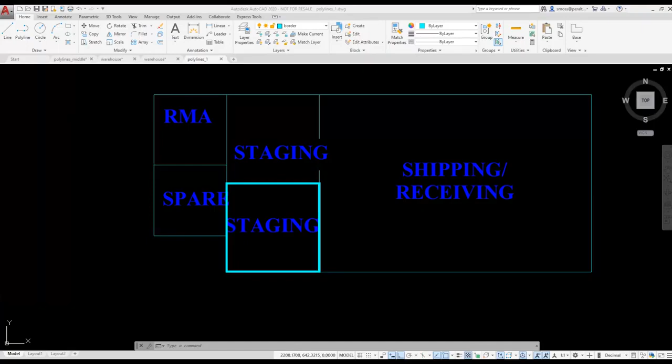The first thing I notice is that the text I have here is too big for the spaces. I want to select it and change the text size. A fast and easy way to do that is to use the Select Similar command.

I select one of the text elements, right-click, and choose Select Similar. All of the text is now selected. I right-click and choose Properties.

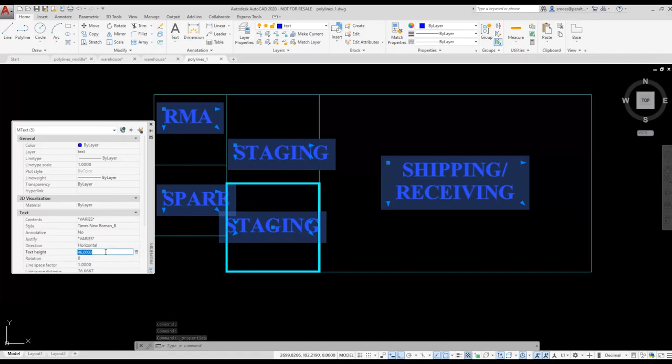I want to change the text height. Right now the text height is at 48. I'm going to change it to 30 and press Enter. Notice that all the text immediately changes. I was able to select all the text elements very quickly and adjust the size using Select Similar and Properties.

Next, I want to center the text in each space using the geometric center for each space. I verify that the geometric center snap is enabled on my object snaps on the status bar.

I right-click on a text element and choose Properties. I'm checking to see the justification setting for the selected text. It's justified as top left. I changed the text justification to middle center.

I should be able to use the grip in the middle of the text to position the text inside the space and use the geometric center to locate it. It doesn't work. I press Escape to release my selection. I need to figure out why it doesn't work.

The reason it doesn't work is the space isn't defined using polylines. They're individual lines. AutoCAD displays the element information when I hover over the elements. I have one existing polyline in this drawing right now, and that is for the lower staging area.

In order for me to center the text properly, I need to set up each of these spaces as a polyline. I'm going to change my layer to border to make it easy for you to see what I'm doing.

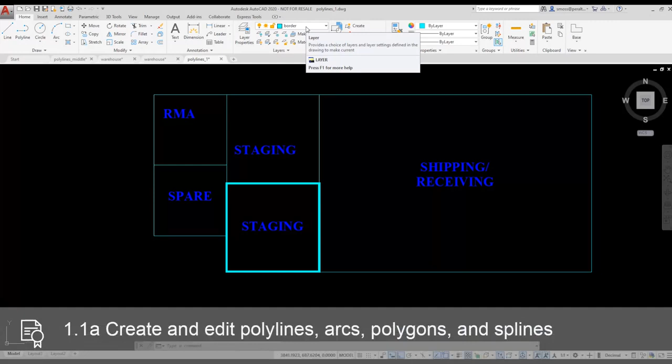There are two ways for me to create polylines. I could use the Polyline Edit command and convert the existing lines to polylines, or I could trace over the existing lines to create a new polyline. I'm going to demonstrate both methods so you can see how the different commands are used.

I enable Ortho on the status bar. This ensures that any line segments I draw will be straight. I'm going to start by placing a polyline for the RMA area.

I'm going to select the polyline from the Draw menu on the Home ribbon. I'm going to select a start point and right-click and select the width option. I'm going to set my starting width for 10 and my ending width for 10 to make it easier to see the border. Then I'm just going to move my cursor around the space and use the existing endpoints to help me create a new polyline. I right-click and select Close to complete the polyline.

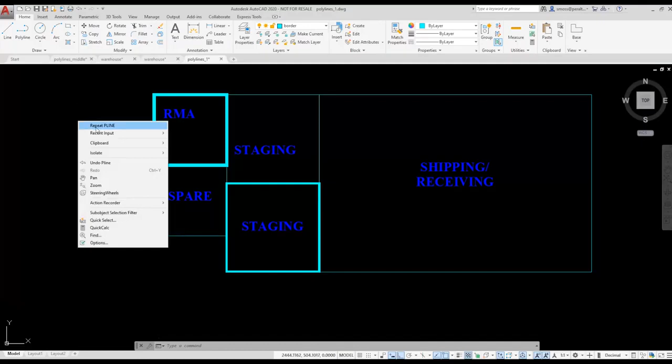For the spare area, I'm going to create another polyline, but I'm going to add an arc to the left side. Polylines can be composed of both arc and line segments.

I right-click and select Repeat Polyline. The polyline retains the last width value I entered, so I don't need to reset it. When I get to the point where I want to place an arc, I right-click and select Arc to switch to arc mode. Once I have selected the 2 points that define my arc, I right-click and select Line to switch back to line mode.

To complete my polyline, I just right-click and select Close to close the polyline. I'm going to create a polyline for the top staging area. I right-click and select Repeat Polyline.

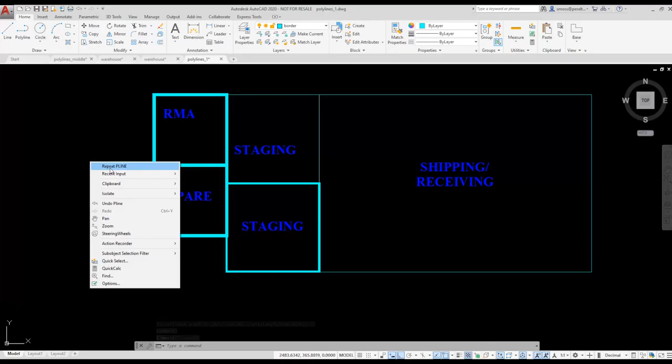I missed the endpoint on the second line, and that made my line segment a little too long. I don't need to start over. Instead, I can right-click and select Undo. This allows me to reselect the point I want and keep going. Then I right-click and select Close.

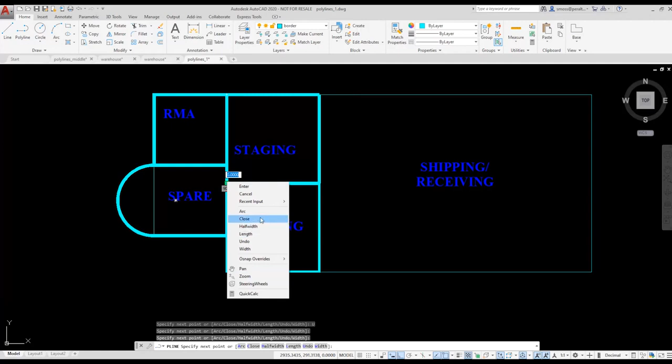For the shipping and receiving area, I'm going to convert the existing lines to a polyline. I can select the Polyline Edit tool, which is located in the extended area of the Modify panel, or I can just type the shortcut PE for Polyline Edit.

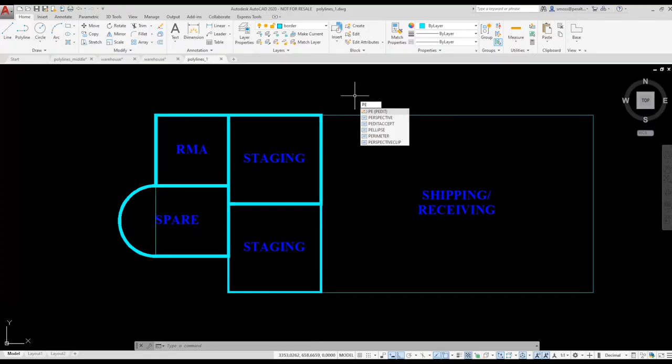I type PE for Polyline Edit and select one of the lines for the shipping and receiving area. I am asked if I want to convert the line to a polyline, and I press Enter to accept the Yes option. I then right-click and select Join to add the additional lines to the polyline object.

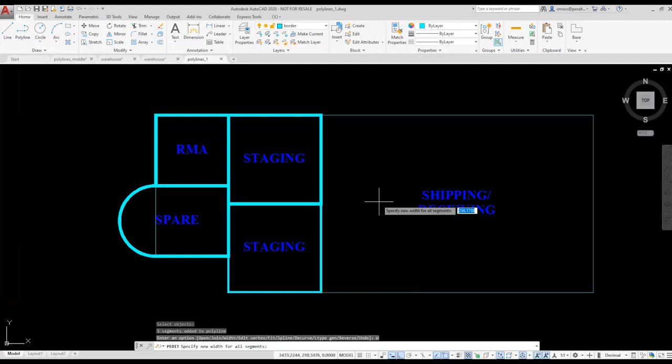I need to change the width to 10, so I right-click and select Width and change the width value to 10. I then press Enter to exit the command. Now when I hover over the rectangle, AutoCAD displays that the element is a polyline.

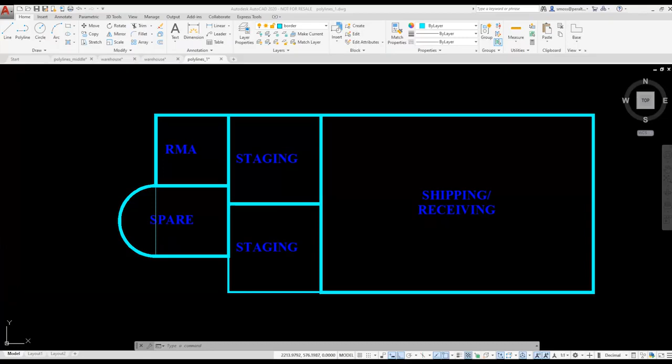In order to position the text in the center of each of the polylines, the fastest, easiest method is to use the geometric center snap, which I'll demonstrate in the next lesson.